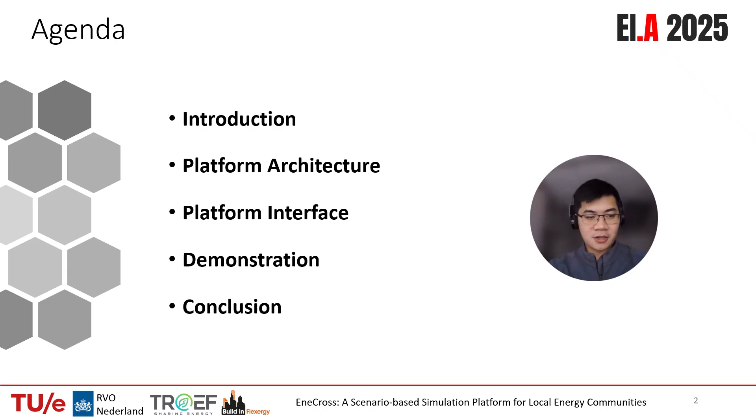So first, I would like to introduce the background. The pressure to reduce CO2 emissions drives the ongoing energy transition. And in this transition, buildings are evolving from passive consumers to active prosumers with the installation of PV, battery, heat pump, and their own control strategies.

This shift indeed supports the emergence of the local energy community, which is a group of residential, commercial, or institutional buildings that coordinate their distributed energy resources to increase their sustainability, flexibility, and self-sufficiency.

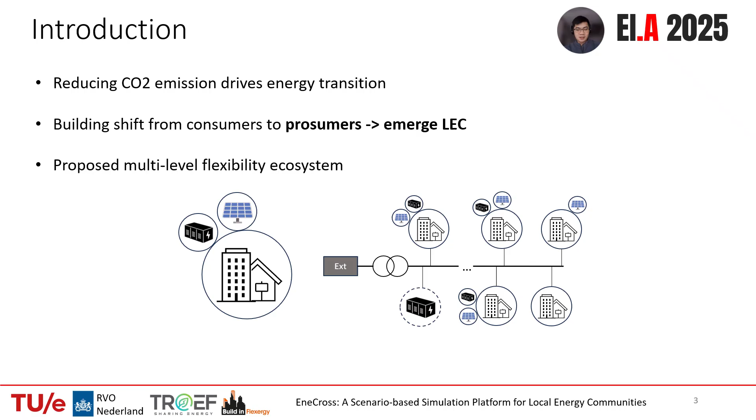So I reviewed some existing commercial and research tools to identify their capabilities and limitations for local energy community design. And indeed, commercial tools like EnergyPlus, OpenStudio, and DesignBuilder are either too complex, mostly focus on single buildings, or lack flexibility for community-scale modeling.

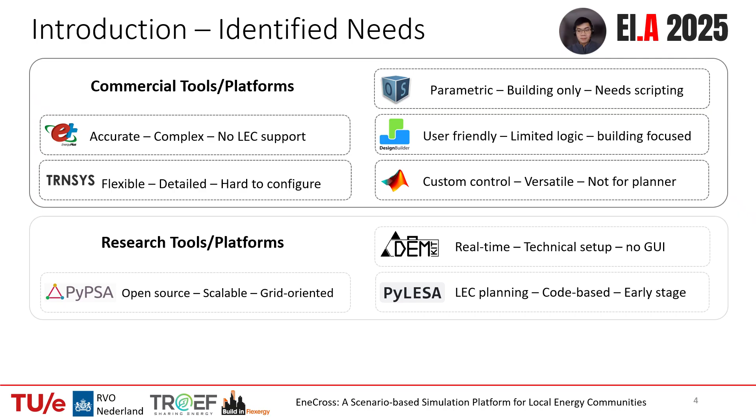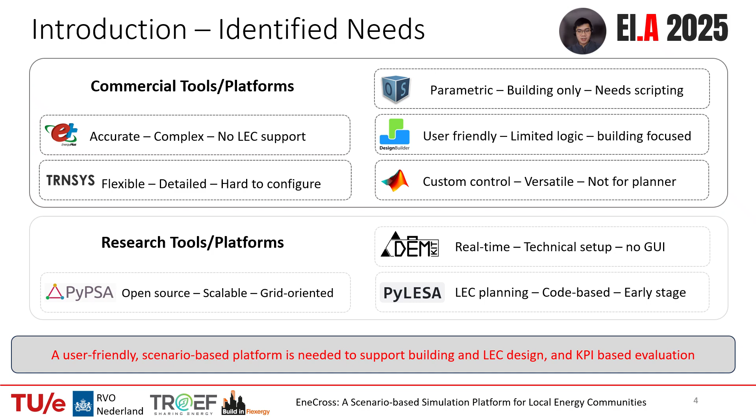And on the research side, tools like DEMKit, PyLESA, or PyPSA provide advanced control and large-scale modeling, but they are code-based and lack a user interface. So this reveals the need for a user-friendly, scenario-based platform to support building and local energy community design with KPI evaluation to guide decision making.

And indeed, our developed platform, EneCross, can support detailed building simulation and multi-building coordination with distributed energy resources control and flexibility integration. It also supports scenario-based planning, provides a user-friendly interface, has KPI visualization, and can export the simulation results.

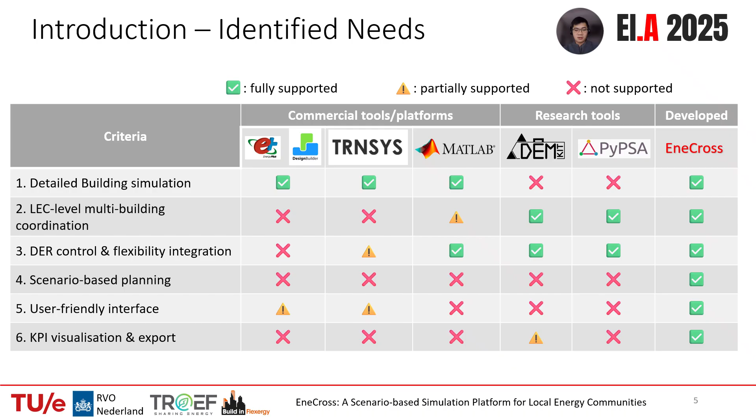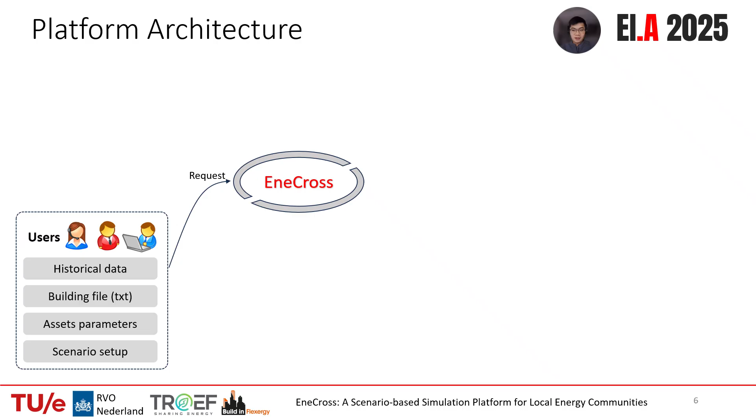So now I present the high-level architecture of the platform. The user will provide the key inputs, including the historical data of the demand profiles, the PV generation, the building parameter files, also the asset parameters and the scenario configuration. Meanwhile, external data sources like day-ahead electricity price, CO2 factors, and weather data are preloaded into the system.

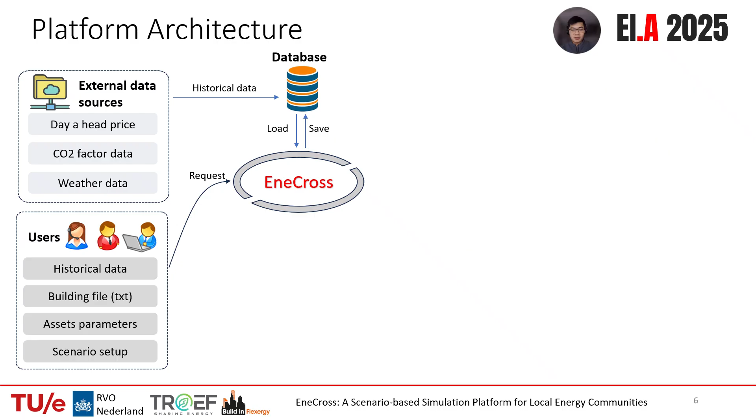The core of the system is the EneCross engine, which handles user requests, loads the necessary input, and then coordinates the simulation process. The simulation control is handled through the FlexMS, which stands for Flexibility Management System, a flexibility engine that contains components, models, and optimization strategies. It enables simulation at both the building level and the local energy community level.

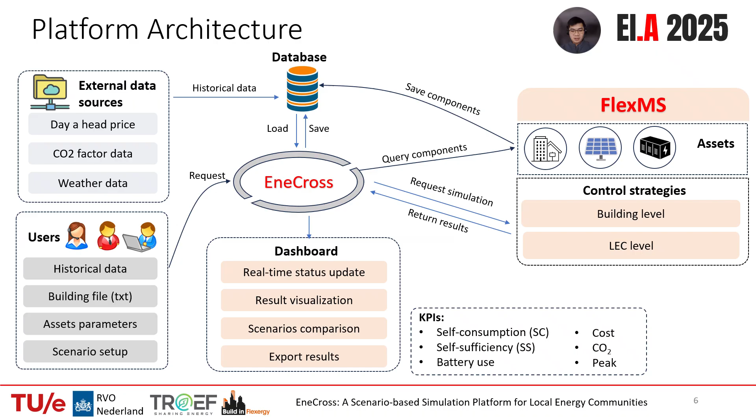The results are then passed to an interactive dashboard where the user can visualize the outcomes, compare the scenarios, and export the entire year simulation result. The KPIs here include self-consumption, self-sufficiency, battery use, operational cost, CO2 emission, and overpeak indicator.

So then at the top left, the platform will calculate the thermal electricity demand from the building parameters, weather data, and the retrofit package, which here is the improvement of the insulation, window transmittance, and the infiltration rate. In the FlexMS, the control strategy includes building, PV, and battery models.

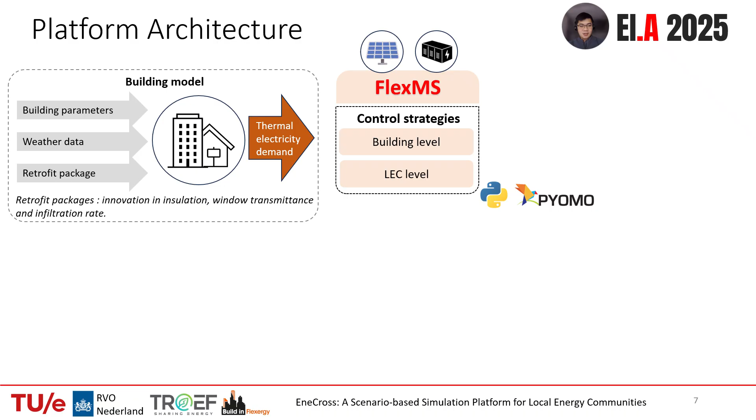They are implemented using Python and the Pyomo environment. They can apply at two levels. At the building level, the goal is to minimize the grid exchange, then maximize the self-consumption. And at the local energy community level, it targets to minimize total operational cost, considering the penalties of PV curtailment and demand flexibility.

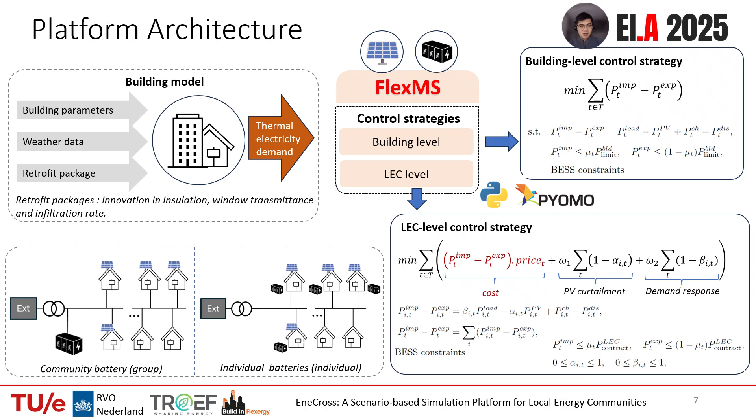Both control strategy levels are subject to the power balance equation, capacity contract limit, and battery constraints. At the local energy community level, the control logic works across two configurations, with the community battery or the individual batteries, as you can see on the screen.

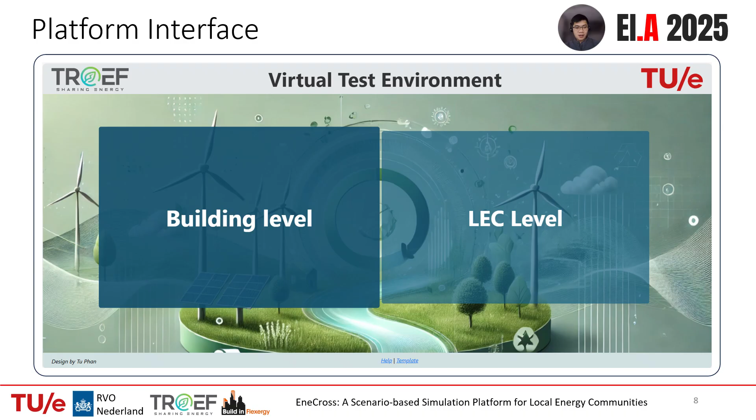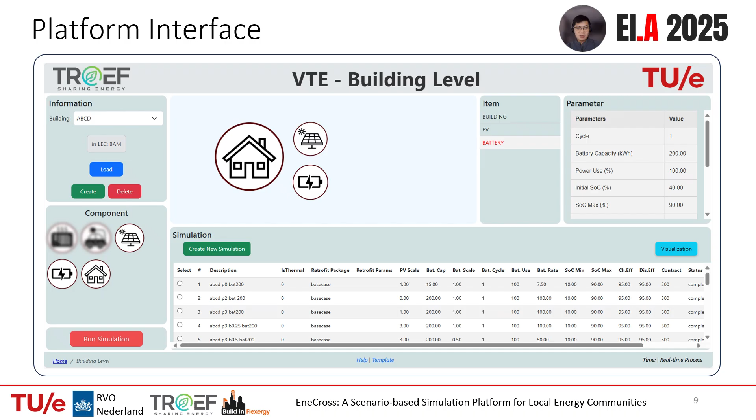Then I would like to introduce the platform interface. This is the home page of the platform, which navigates to the building level or the local energy community level page. This is the building level page, where the user can configure different scenarios to run the simulation. And this is the local energy community level, where the users can manage the local energy community and run the simulation with different configurations.

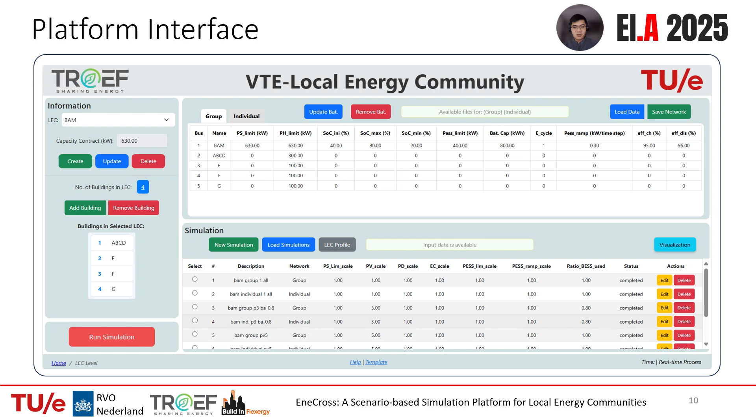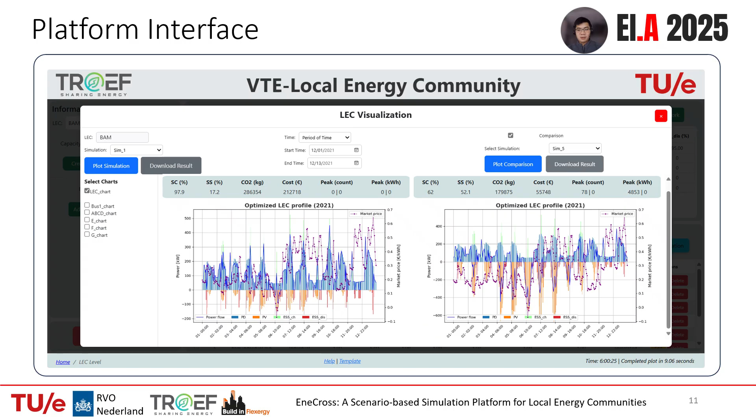And here is the visualization page, where the user can analyze the results, export the simulation data, and compare simulations side by side. In this demonstration, the platform is applied to the BAM campus, a construction service company in the Netherlands, which includes one cluster of buildings ABCD and three standalone buildings EFG.

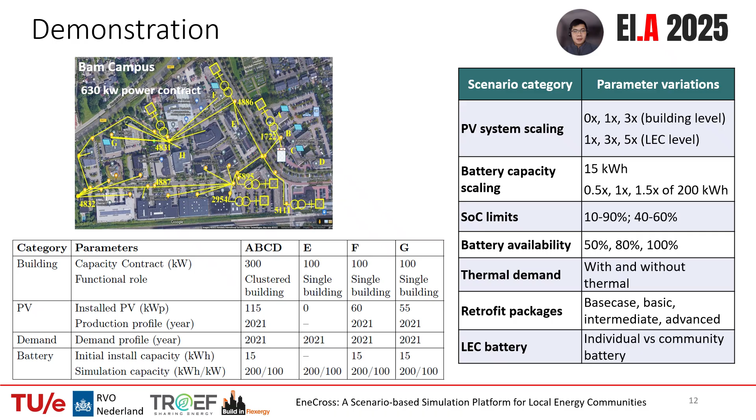The simulation is set up based on different PV sizes, battery capacity, state of charge limitation, thermal demand, and also the local energy community battery configuration. The simulation includes both the building level and the local energy community level. Here I want to focus on the local energy community results. The rest is shown in detail in the paper.

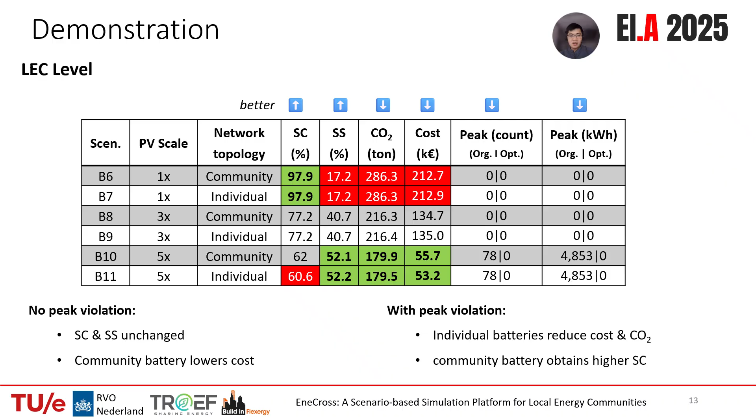So the user can generate more and more scenarios to make the comparison, to make the final decision on what size of battery and what size of PV they would like to install.

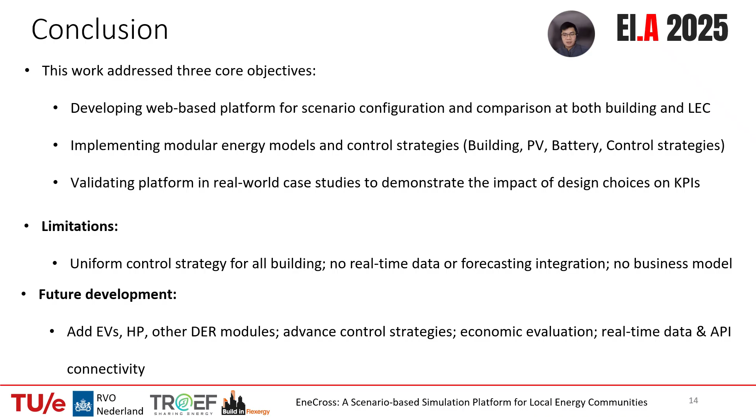Looking ahead, future work may add more assets like EVs and heat pumps, implement more advanced control strategies for different buildings in the local energy community, include economic evaluation, and implement real-time data processing for the operation phase.